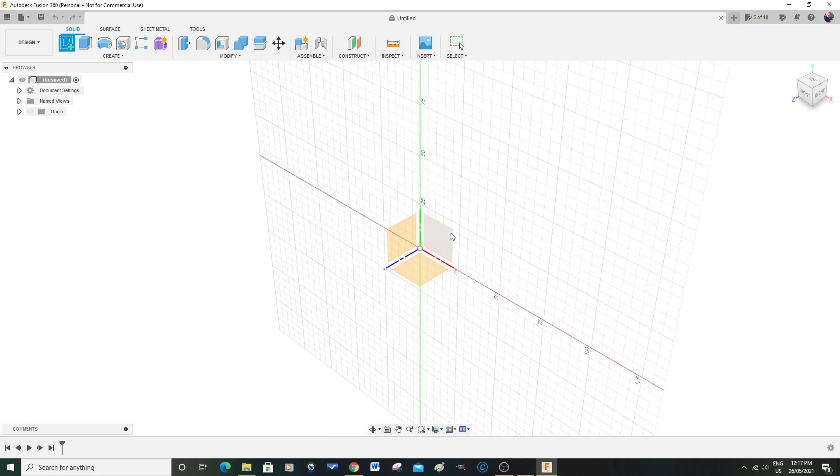To start working with Fusion 360 you need to start with a sketch, which you come up here for. After choosing create a sketch, this little icon comes up prompting you to choose a plane, a face, or a surface, and it really doesn't matter - you can choose any one you like. Later in the program, if you are doing CAM, you can alter which plane you are actually in. Just for argument's sake, we're going to choose this one.

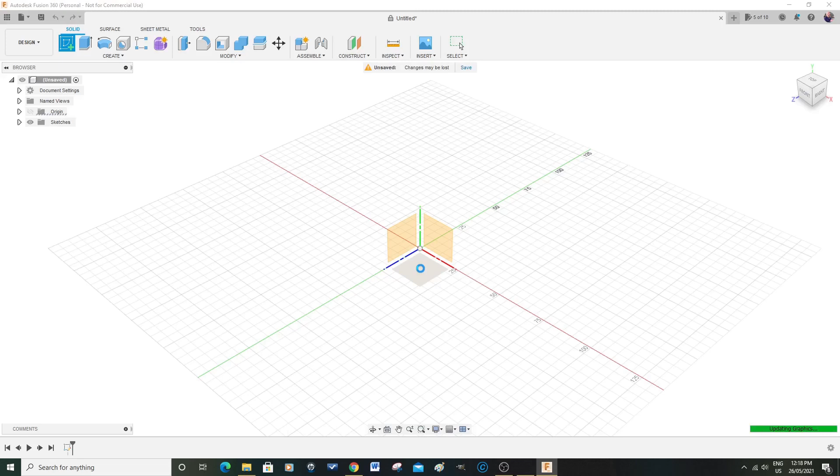If you notice in the background there, it just said updating graphics - so it just updated my graphics card, which is very nice. Now we're going to go to the view cube and just press on top, so then it squarely looks at you. If you want to move the grid around or any object on the grid, you can come down here and press on pan, then come up here, left click, and you can move it around, and zoom out and zoom in.

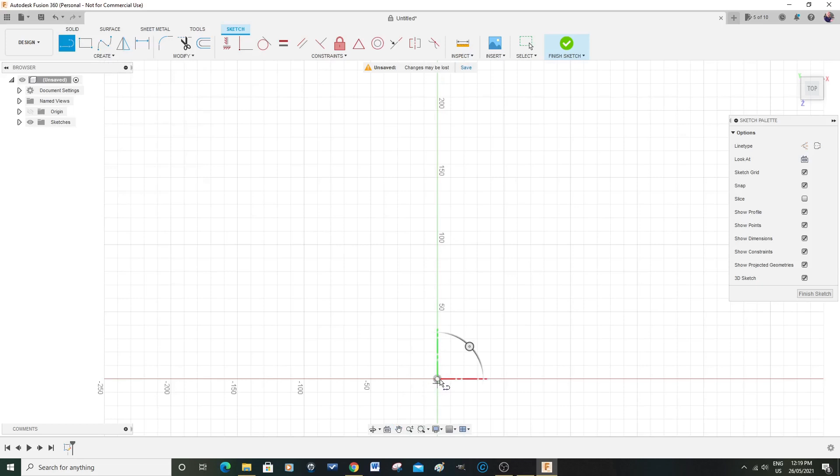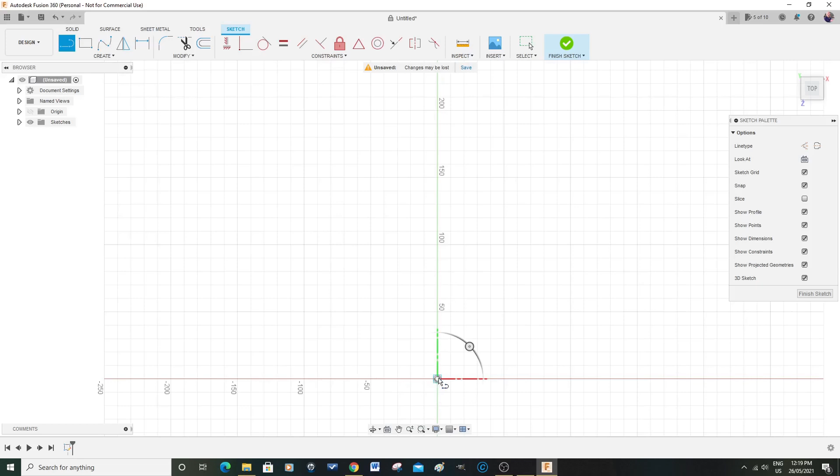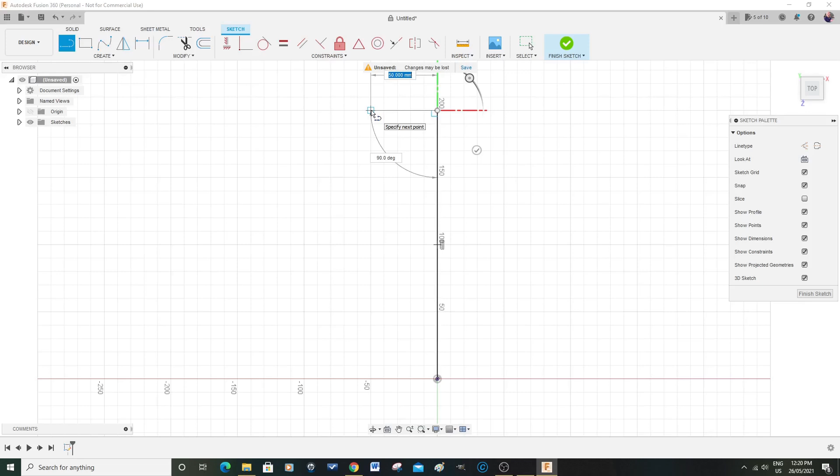So the anchor point is here - I'm going to left click, go up to 200, release, and then you notice the icon jumps from here up to here, and it follows my cursor around. I want to come out here to, let me see, 50 millimeters, and we're going to left click there again, then come down, left click, and back to the anchor point, left click.

You will notice that two of the lines are blue and two of the lines are black. That's indicating to me that these two lines in black are constrained. So what we need to do - it's not totally necessary because this is only really a framework - but I'm going to show you how to constrain it.

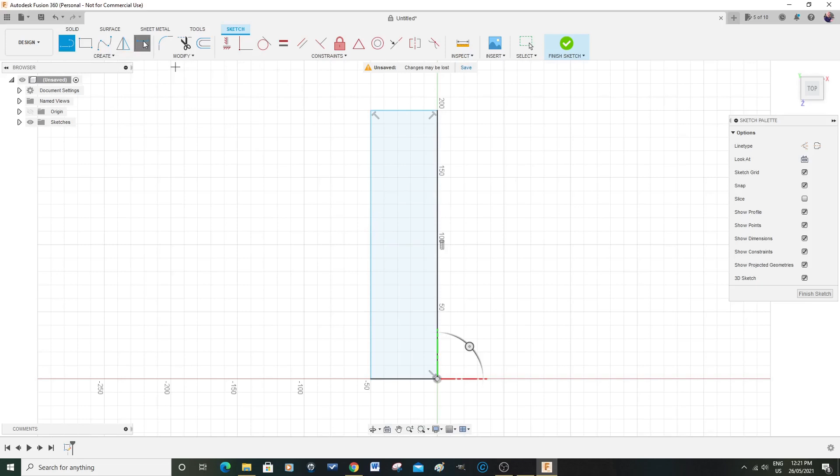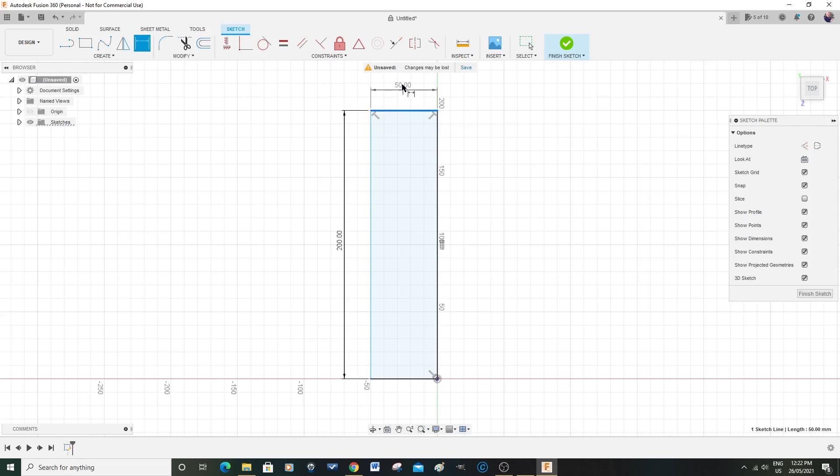I'll put a constraint on a line and make this go black. All I'm going to do is come up here, sketch dimension, choose that blue line, draw it out, and click. It's the right amount, so I'm going to press enter. And then this one, 50, enter. Now you will see all the lines have turned black. This is now what is termed as fully constrained - you can't alter this unless you purposely go in and edit it.

Now to alter the icon here that I'm moving around, you just press escape and it changes back to a normal cursor.

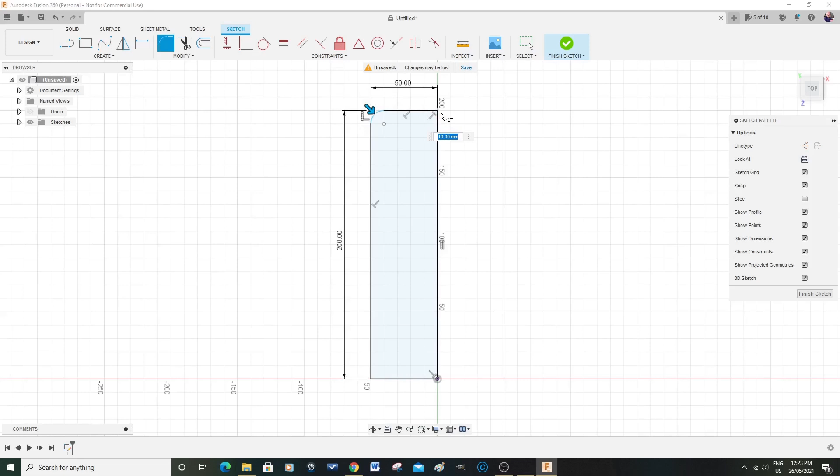So the next thing we're going to do now is put some rounded corners on here because it's RHS. We've got to modify, fillet, press that, and it is 10 millimeter - that's exactly what I want. 10 millimeter, 10 millimeter, 10 millimeter, and 10 millimeter, which is perfect. Enter. Now that's locked in.

Now the next thing we're going to do is come to modify again, and we're going to offset. So we're choosing that to offset. Now you can either catch hold of it and manually move it in, or you can give it an absolute figure, and in our case it needs to be minus 4.0 millimeters. Press OK.

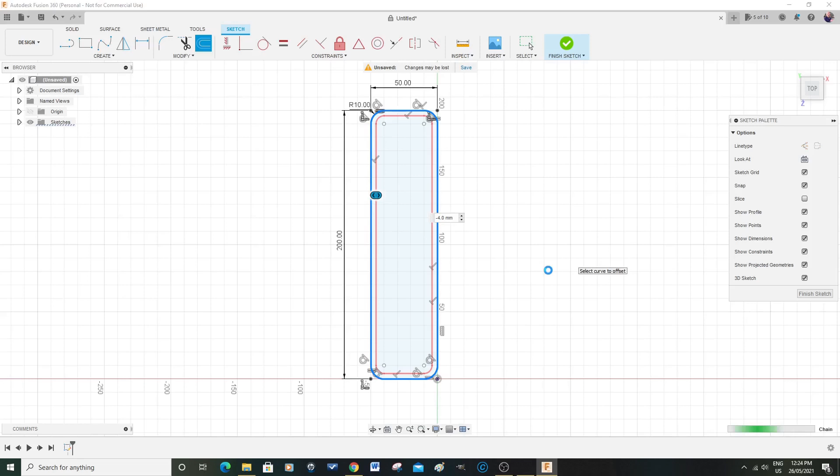And it's just started to pour with rain outside. I hope you can hear me okay above that.

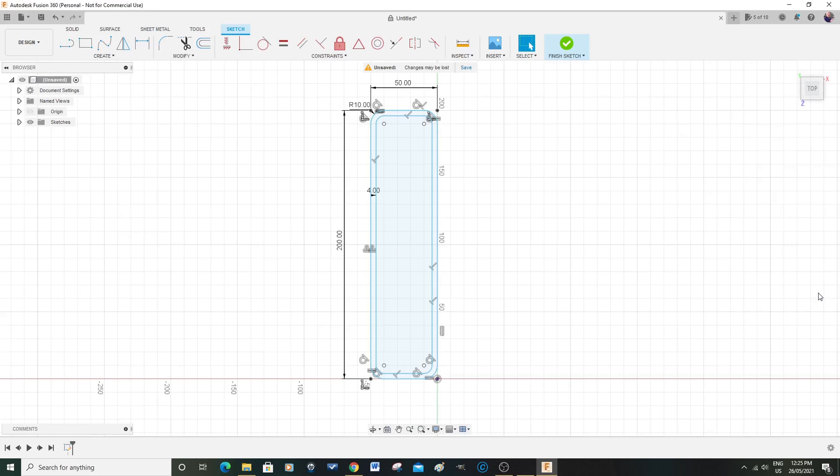So the next thing we're going to do now is extrude this, and that is a very simple process. We've finished this part of the sketch now, which takes us into the mode of extrusion, and we want to extrude that part.

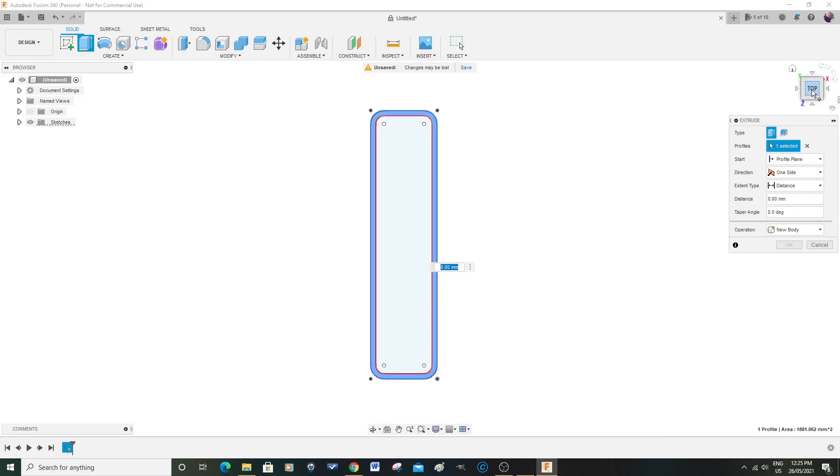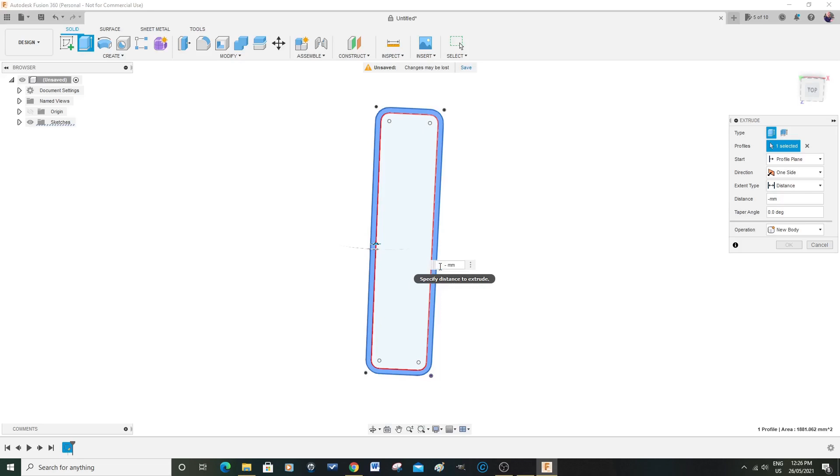So it's highlighted. Now I'm just going to move the view cube, rotate round, and I want to go, I should put an absolute figure here, so I want to extrude it back away from me, so that will be a minus, we're going to go 2 meters, so that's 2,000 millimeters. Enter.

And it's as easy as that. That's one RHS made. And RHS means rectangular hollow section.

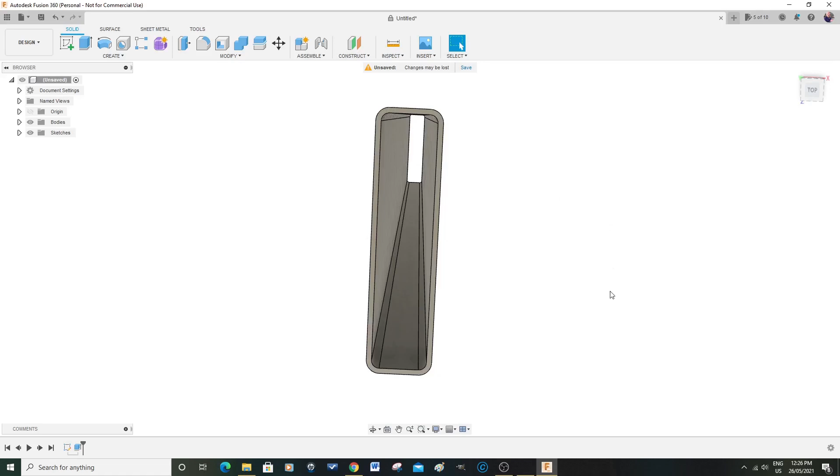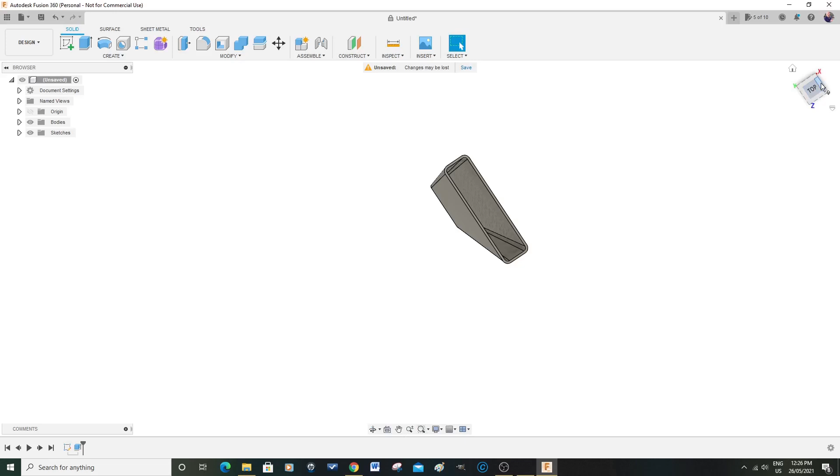Okay, so let's zoom out a little bit, and now we can go to the orbit and move this around in free space. So indeed you can see... escape. So what I'm showing you is different ways of actually moving around in space, like this.

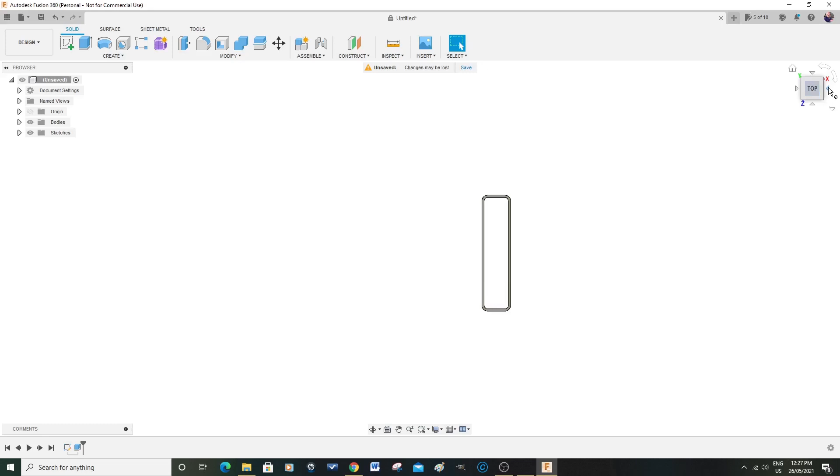So if you put top, you just hit top, it'll go sideways. So you can see that it is a piece of RHS. Pan. Let's pull it in. And actually this is where we actually need it right now.

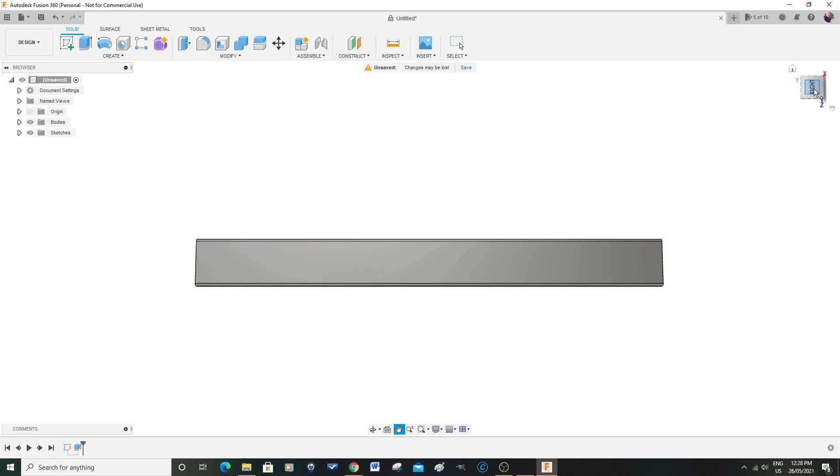Okay, so now I'm going to do the cross sections. If you remember at the beginning of the video, I showed you that we were going to model up in 3D the CNC router that I'm actually in the middle of building at the moment. So we have one section here, which is one of the main, this is the Y axis.

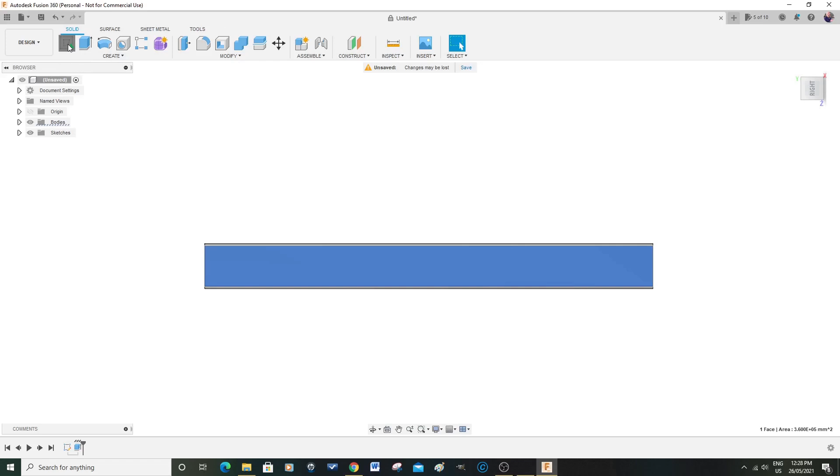So now we want to make the cross sections. So what we'll do is, and this is actually upside down at the moment, so this is going to be the bottom, this is going to be the top. So I'm going to choose this face to work off, sketch this face, and I'm going to zoom into this area here.

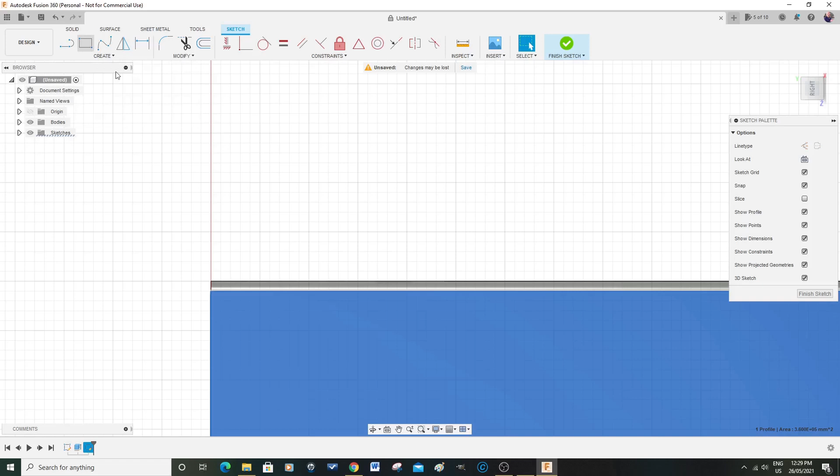So the cross-section RHS is 50 by 50. So I'm going to choose a rectangle. I'm going to come here. You can see it's locked there. You see how the cursor changes. I'm going to draw it up. Oh, it's 100. 50 by 50. Enter.

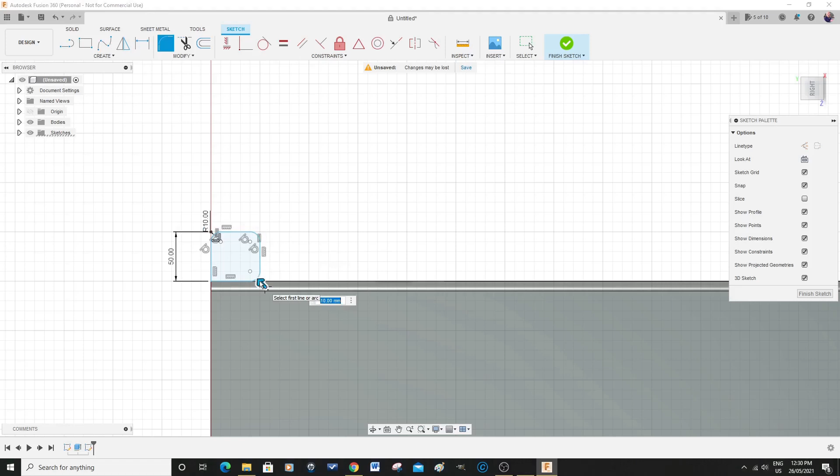And then I'm going to come here again, choose the fillet, and again it's 10mm, which is exactly what I need. 10mm, 10mm, 10mm, and again 10mm. Press enter. So that's locked in.

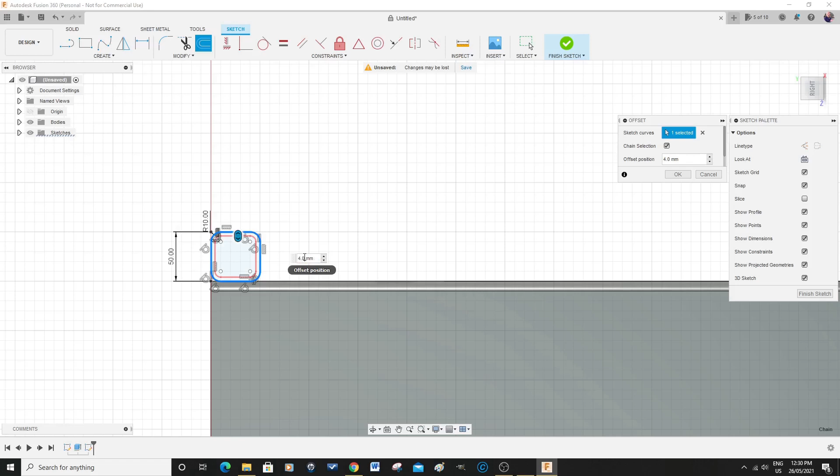Now what we need to do is choose the offset, choose what we just drew, and bring this in 4mm, because it's a 4mm wall. 0, press enter. Now that's locked in.

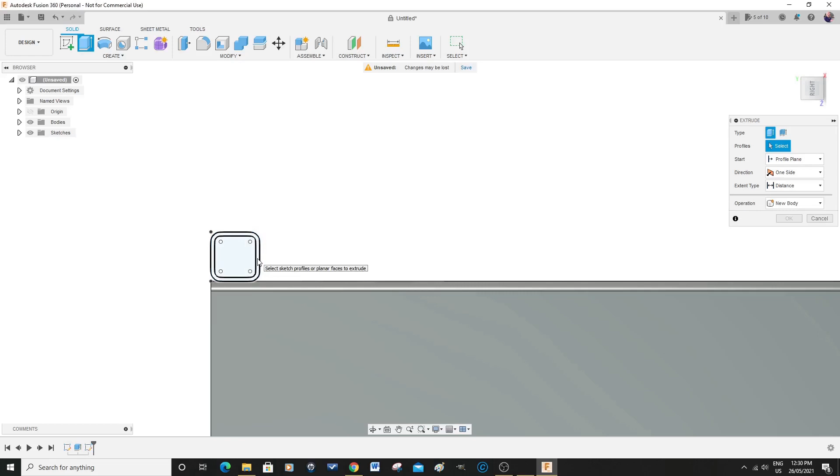Now we've finished our sketch, and we choose what we want to, better press the extrude, press that. Why is that red? There we go. I don't think that really matters.

So we want to go minus 1500. Minus, oh, that's 15,000. A little bit too much. Minus 1500, and we'll go enter.

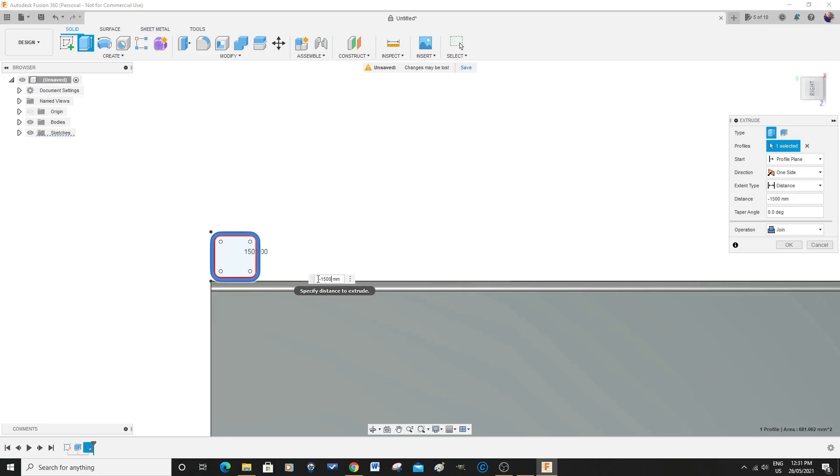And we're going to zoom out. Have a very quick look. And there it is, connected right where we want it.

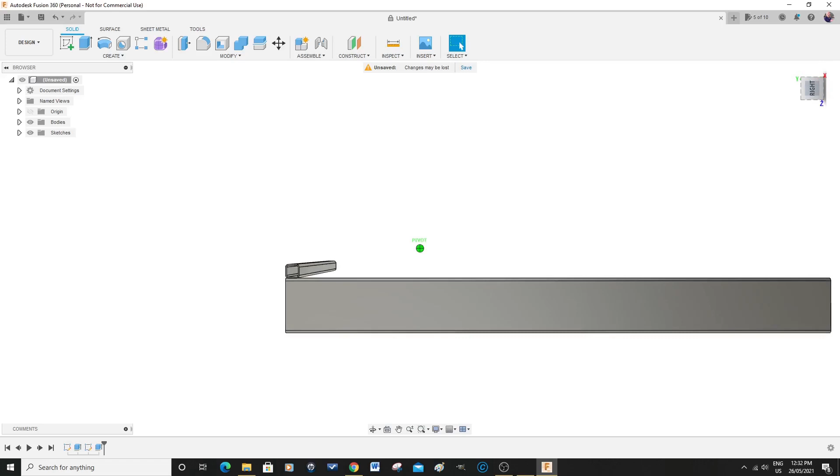Now then, we come to a very neat little trick to be able to avoid going through the process of making these individually, drawing these all the way down here.

So what we're going to do is duplicate this whole piece and place it in strategic areas further down the beam here. And the way we do that...

is you can either go up here to bodies and sketches, and choose which one it is, but I find it much easier to come here and choose the body. It highlights it, then come up to the create bar and come down until you come to pattern.

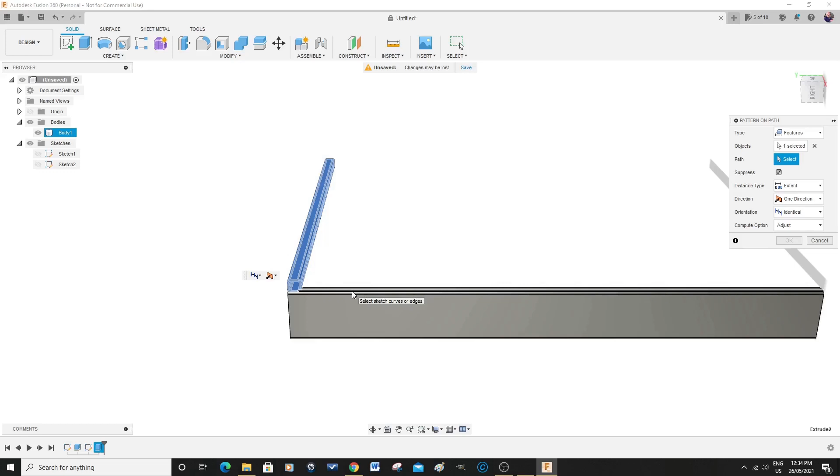When you come down to pattern, you come here to pattern on a path. So better select that again. So then this little dialog comes up. We've selected our part that we want to duplicate, so now we want to select the path, which is here. Just select the line where I'm on there, select that.

So yes, it's in that direction we want to go, and let me see, this is 2 meters, that's 50, so this wants to go 1.90 meters. Might be 1.95 meters. We'll just check. 1 meter.

Keyboard's playing up a little bit.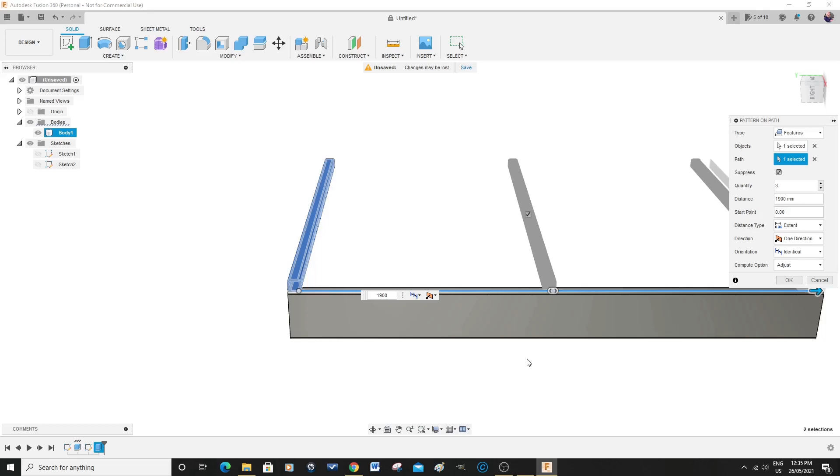1900. Okay, I think that's right. Yep, that's going to take me right to the end. Well, it's actually saying I want 3, now I want 2. So we alter that to 2, and it's going to place one right there. I think that's going to be in the right place. Let's OK that.

No, it's not in the right place. It should have been 95. So if you make a mistake, you can come up here and just delete it straight away. So you just go back.

I don't think it's necessary to even highlight it first. Pattern on a path, select path, that way there. So now we'll put the right figure in.

So Fusion 360 is very, very forgiving.

1950. I don't know what's the matter with my keyboard. It might be because it's winter time here, and this is out in my workshop, and I think the keyboard is playing up. I'm going to have to change it.

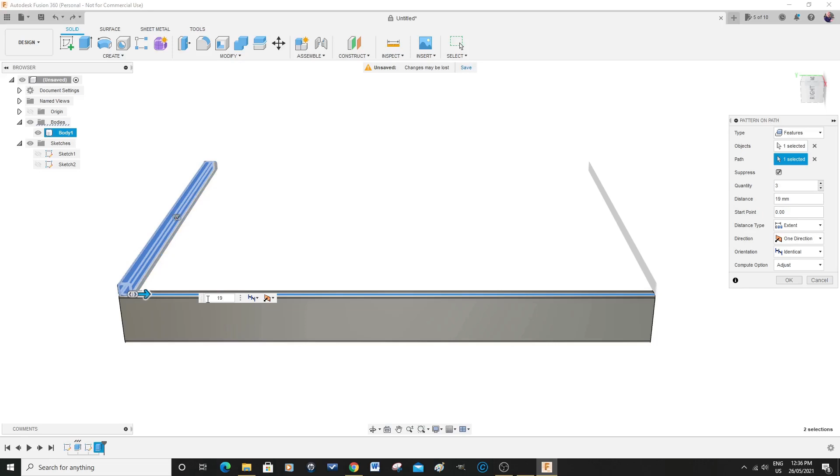50. There we go, and we only want 2, and we're going to OK that. There you go, put it in the right place.

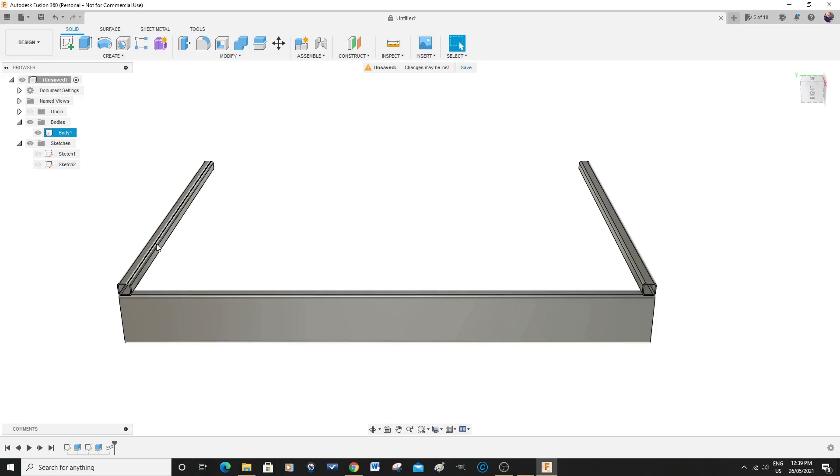So another method of doing this is actually placing, I want another 1, 2, I want another 3 here. We can do it in one shot. In fact, we could have done them all in one shot after making this one. So I'm going to show you that way of placing objects.

So choose the extrusion, create pattern, path, select path. There's the selected path, and what I'm going to do is give it the measurement of this one all the way out here.

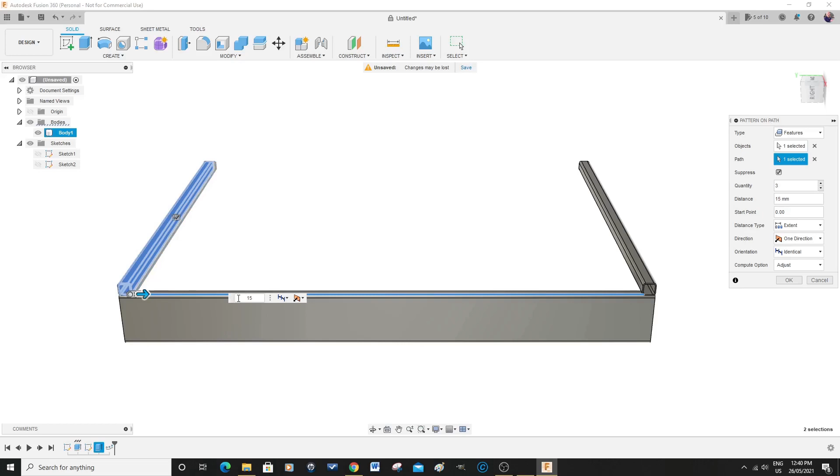So that will be 1 meter and 55... 5. So it'll be 1 meter, 5, done it to me again, 1, 5, 50. That actually looks a little bit too far.

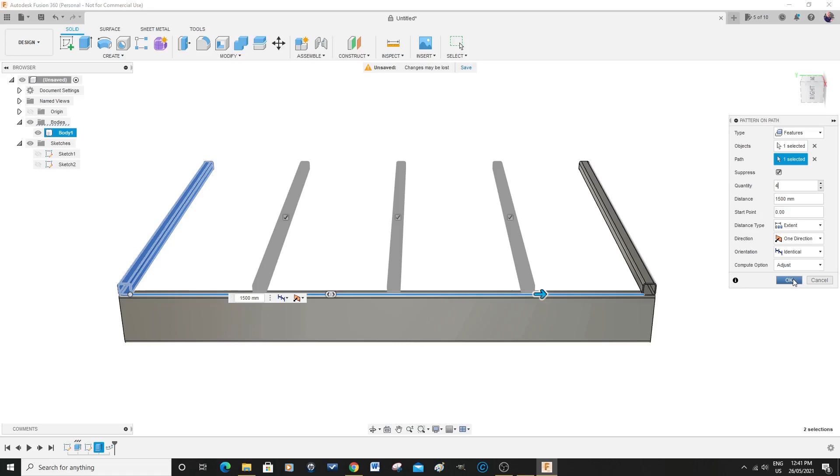Let's try taking that 50 away. That looks better. I'm going to say I want 4, and it's equally spaced. It just takes out a lot of work for you, and we're going to press OK. And there they are, already correctly placed.

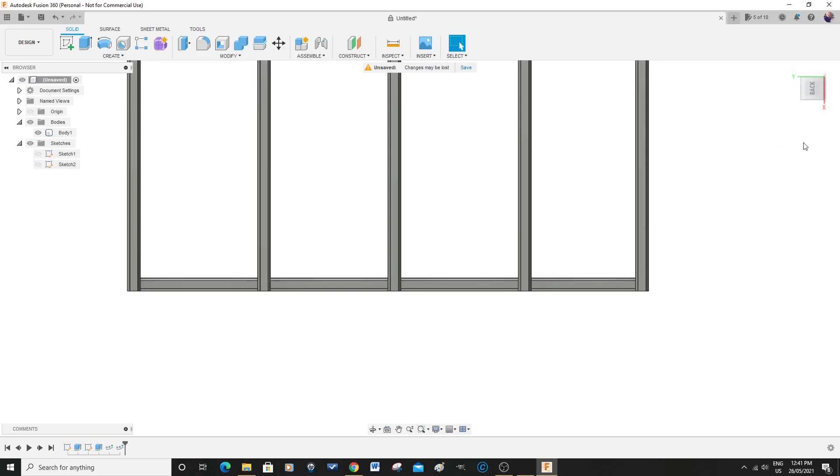So now what we need to do is turn this upside down. First of all, we're going to go there and have a look, so make sure we're happy with it. Yep, I'm sure about that. And there's an end-on view. That looks very good.

Let's just rotate that round a bit. That's looking very good. I quite like that.

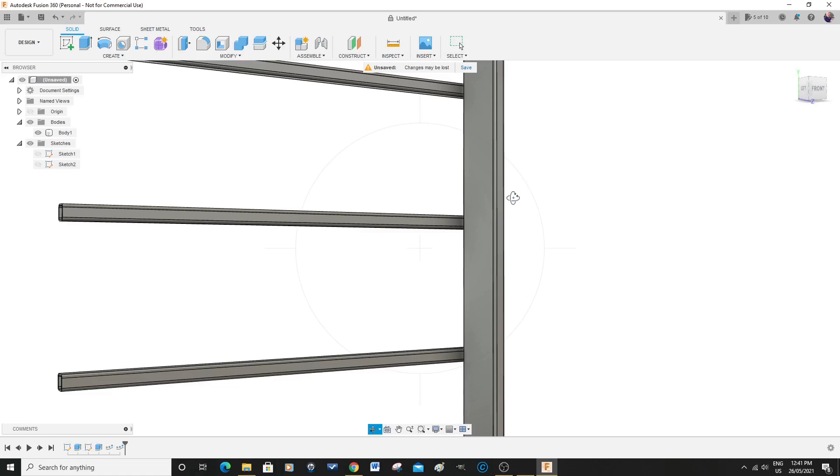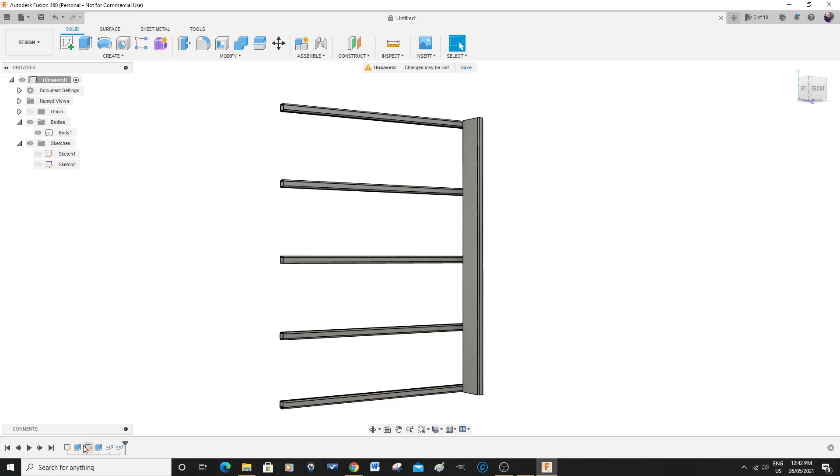So now what we're going to do is choose this y-axis one, and we're going to place one over here. So we press escape to get out of the panning around tool, and we're going to go back into here, which was the first extrusion. Click that one.

And then we're going to go to the create, and we're going to come down here to path, and we want to come up this way. So we're going to choose this center one. So if we go select, choose this center one.

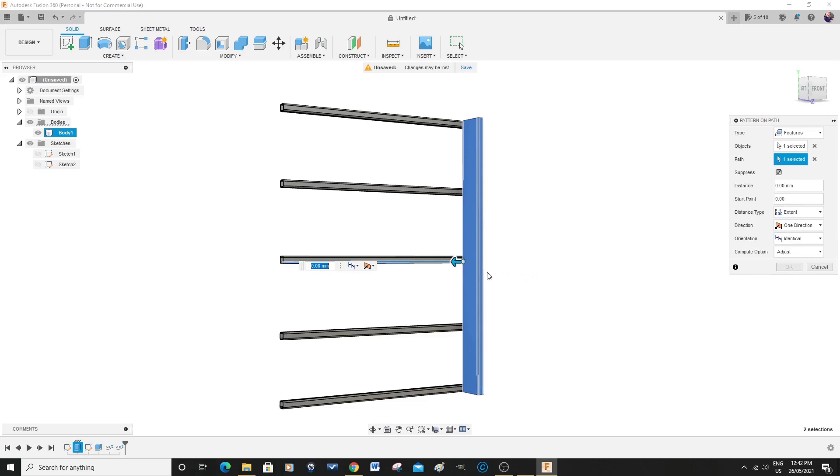And now this is another method of doing this. You can actually catch hold of it and manually pull it out until it becomes right, or what you perceive to be right. That's actually what needs to be 1450.

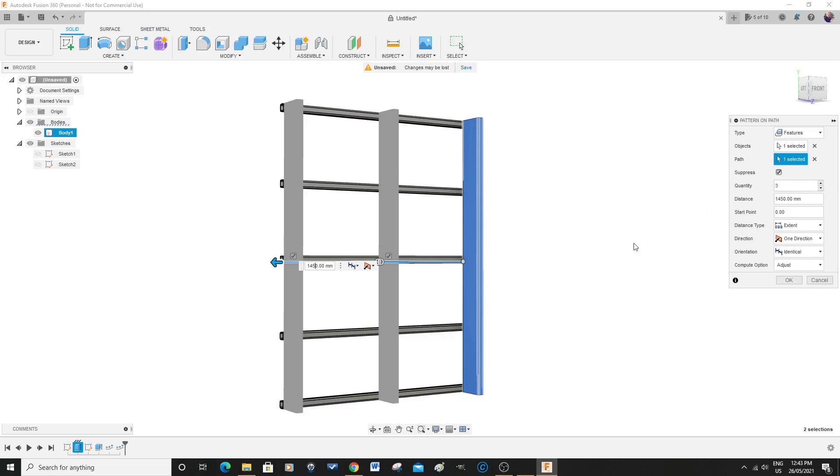It's actually snapping to the end because it's a rounded area on the bottom side. It's trying to connect the flat to the very end, but we're going to say no, that needs to be 1450 because there's a 10mm radius there. Rather than go here and alter the amount or quantity, you can go here and untick that one and it disappears.

Okay, and then press OK, and there it is. So I'm showing you as many different ways of doing the same job, as it were.

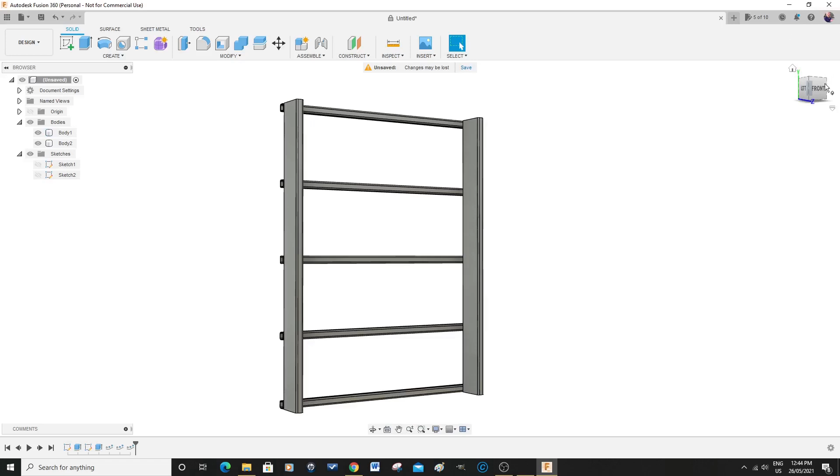Let's move this around a little bit more. Coming onto the view cube, it's looking quite nice now. So you can see that it is pretty easy to make up.

In this case it's a CNC router bed. This is a very simple bed, and it's a bed that I've designed to be simple and easy to make. So what I'm going to do now is show you how to extend a part in a different direction and a different part.

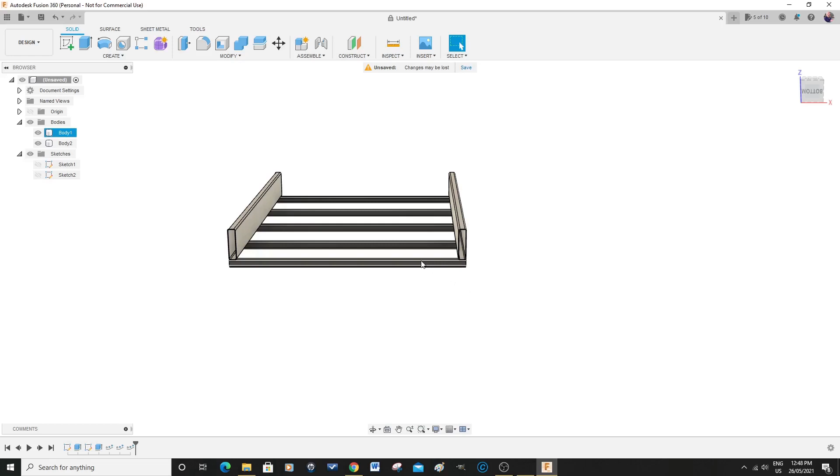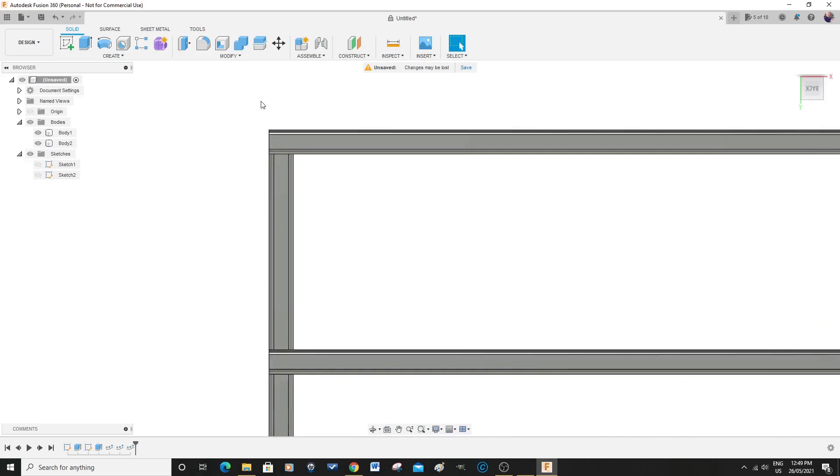So what I'm going to do is flip this over now. You catch on the view cube and just partially move it over, then just press on an area that you want. So we're going to be working in one corner, so we'll zoom into that.

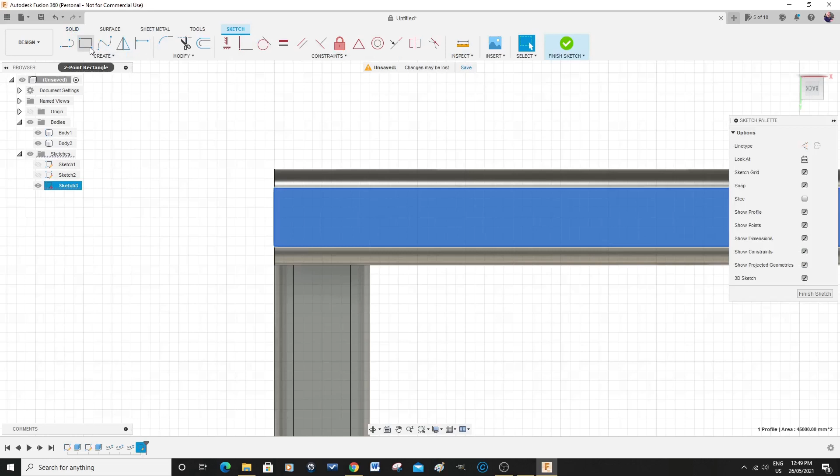Okay, so now we're going to go back to sketch, and you want to sketch on that face, and we want again a rectangle. So we're going to come here, and you can see the cursor actually snap into the grid there, which is a very, very big help.

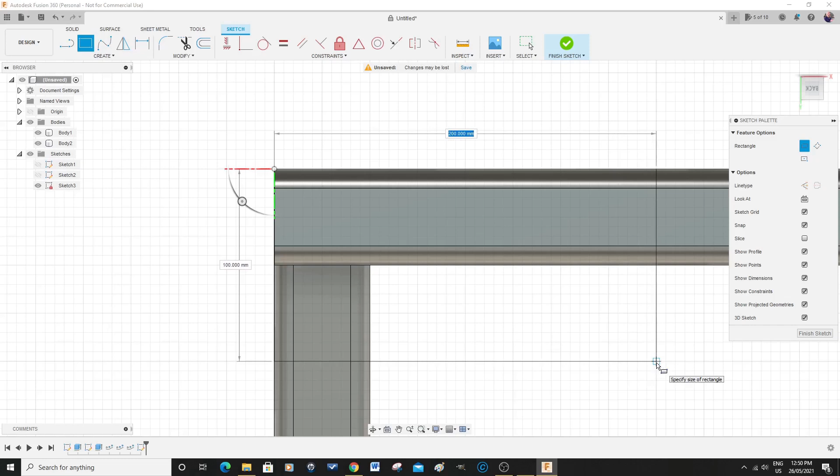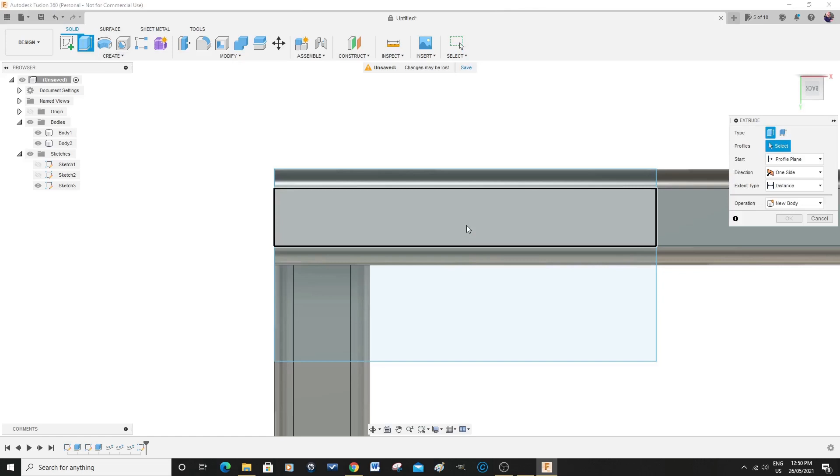Perfect, left click. So that's there now, and we've finished with that. Now we want to go straight to extrude. Sometimes this will happen - you may have to choose three different areas. So you choose one area, then press shift, choose the next area and the next, so you're sure of getting the whole piece you just made.

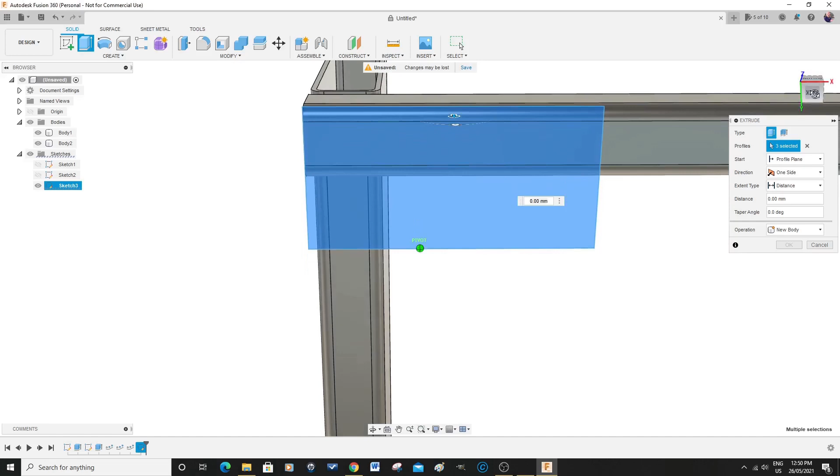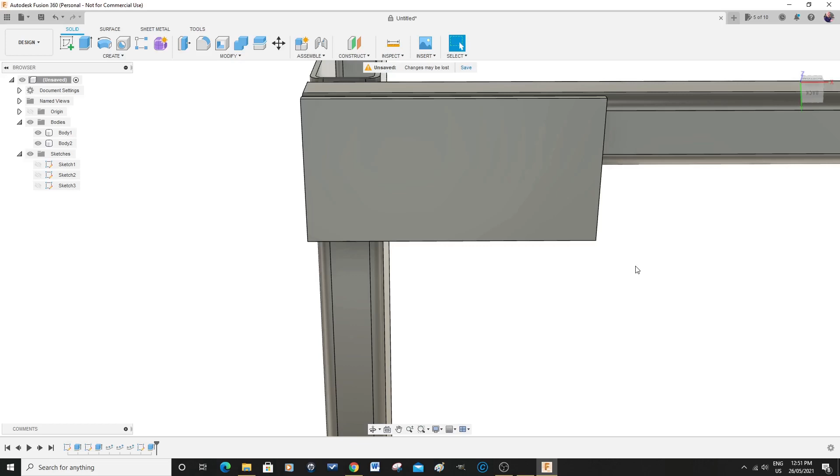Now I'm going to rotate this over a bit so I can see that I'm coming in the right direction. And that needs to be 6 millimeters - I was using 6mm plate. Okay, and there it is, a mounting plate.

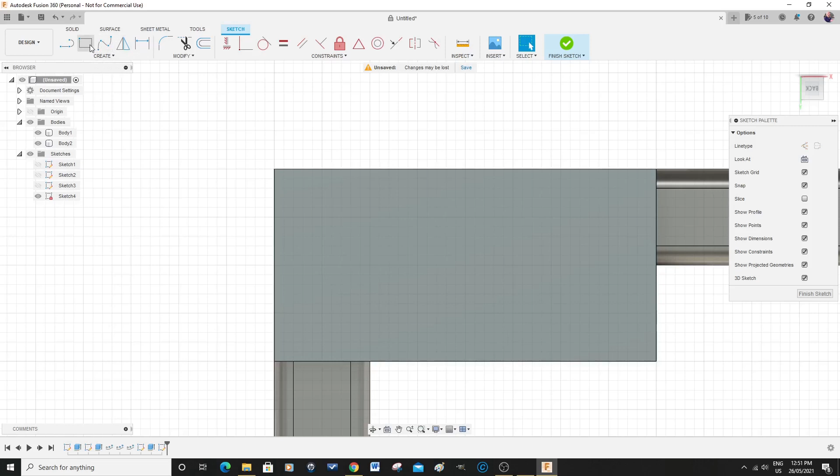The next thing we want to do is look at it square on again, and now we're going to draw a leg. So create a sketch of that plane, come here, 100 by 100, click. It's very simple to use, actually. We haven't finished the sketch yet, but we're going to press enter because we want to keep that.

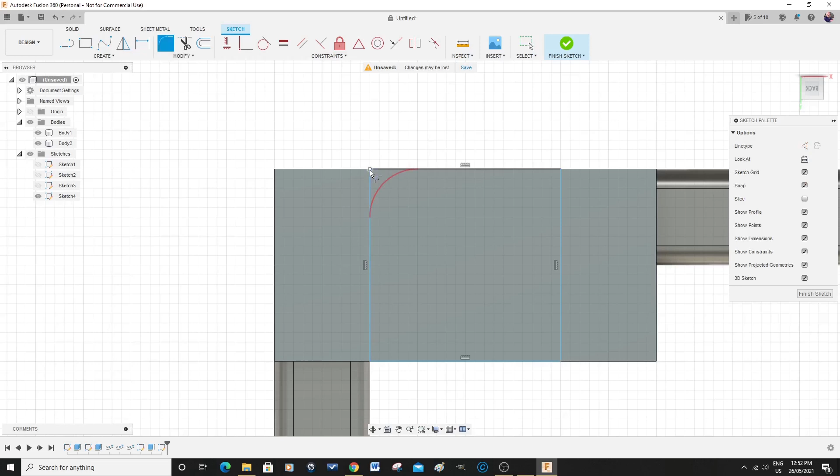Again, fillet this corner. Oh, 25, it's not - it's 10. Better. 10, 10, 10, and press enter.

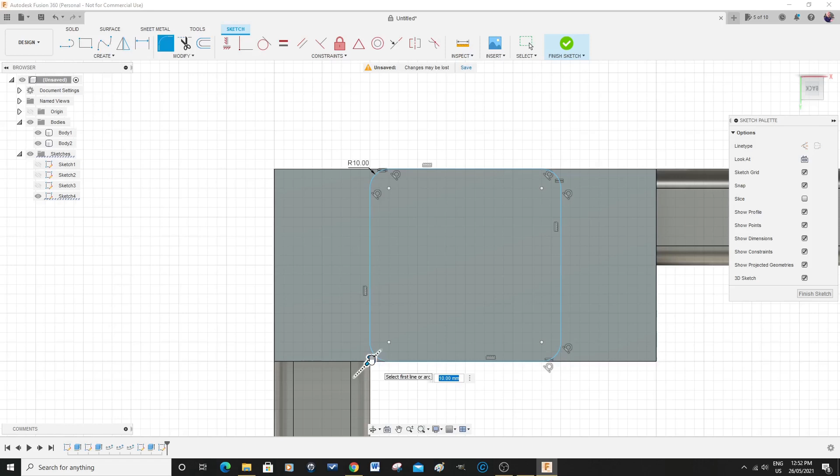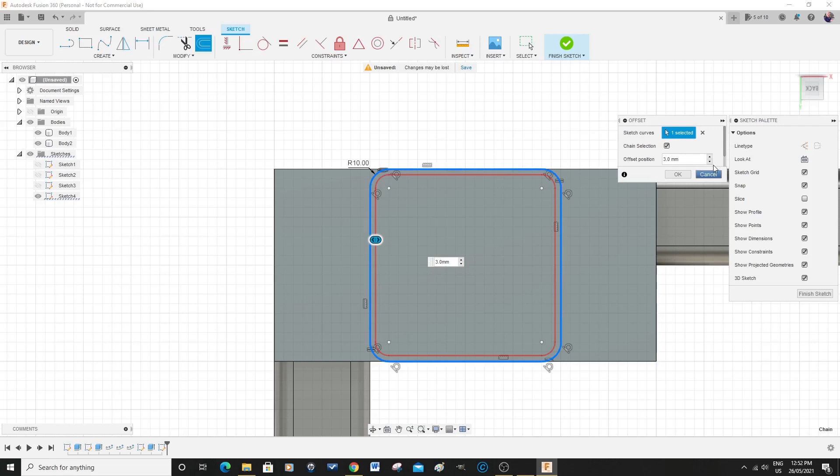So it's the same trick again. What we're going to do is go to the offset tool, choose this, offset it by 3 millimeters - 3mm wall thickness on this 100 by 100, or 4 inch by 4 inch, which is roughly 1/8 of an inch, and we're going to OK that.

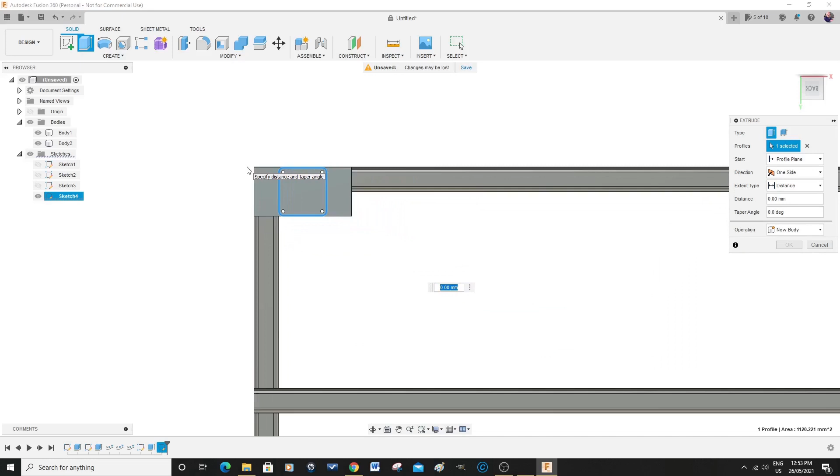And then we're going to say that we've finished doing the sketch, and we want to extrude that. Choose that piece, and again I like to come out and make sure that I'm extruding in the right direction. Just tip it over, and you can pull it out if you want to.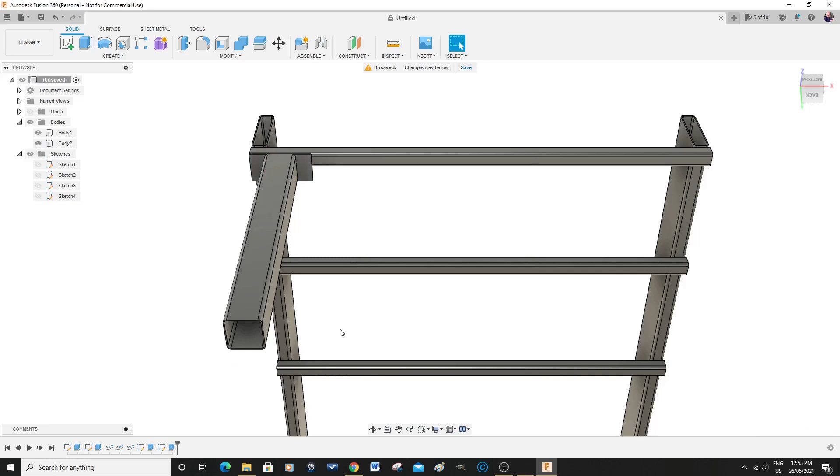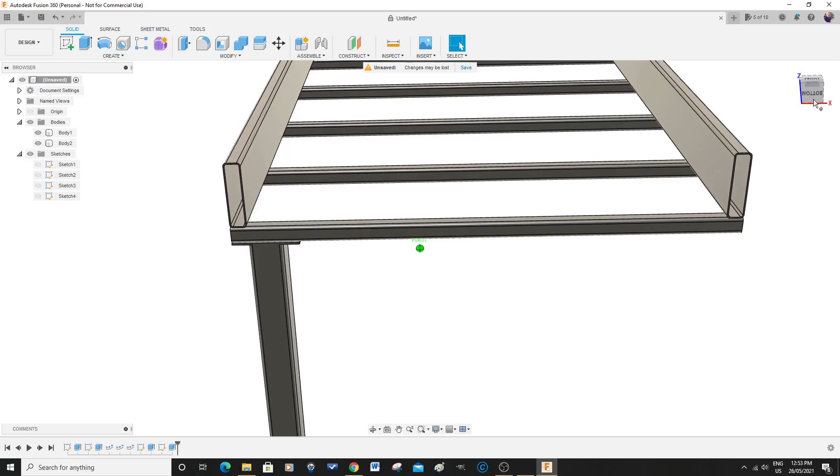800, which is absolutely fine, and press enter. So, and there's one leg. And it's that easy, you know - there's really nothing at all complex in this, and you can build up. This really is a very simple frame, but it's put together very accurately, shall we say, in Fusion 360.

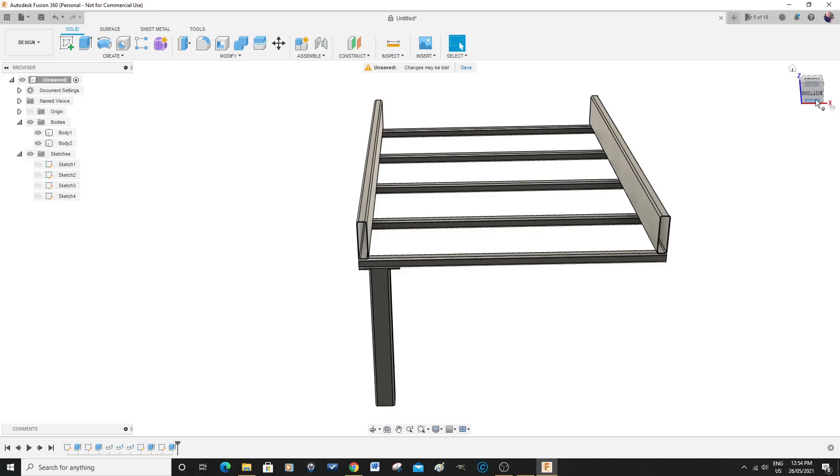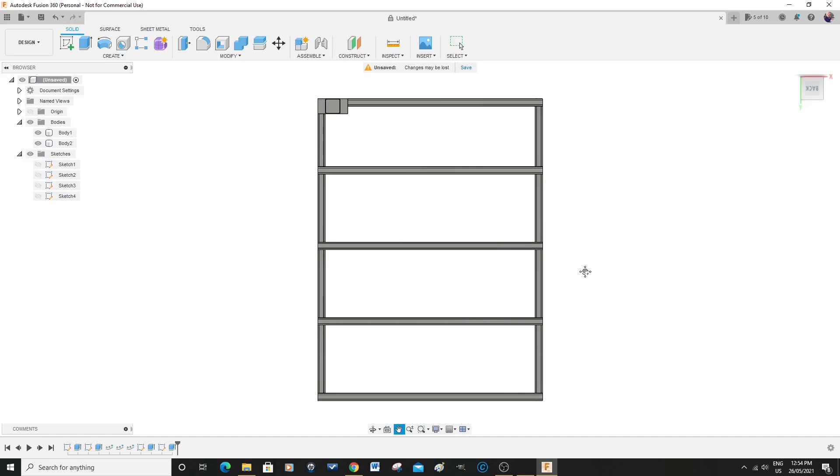So now we're going to duplicate these legs around, one in each corner. What I'm going to do is come here, press back, zoom out, let's pan it a bit so it's in the middle. And it's just the simple process again of copying, you know. Let's press - you notice that the pan cursor is still active, so to get out of that you just press escape.

So what we're going to do is choose that extrusion and that extrusion - what I've done, I just press shift. In other words we're going to duplicate multiple extrusions this time.

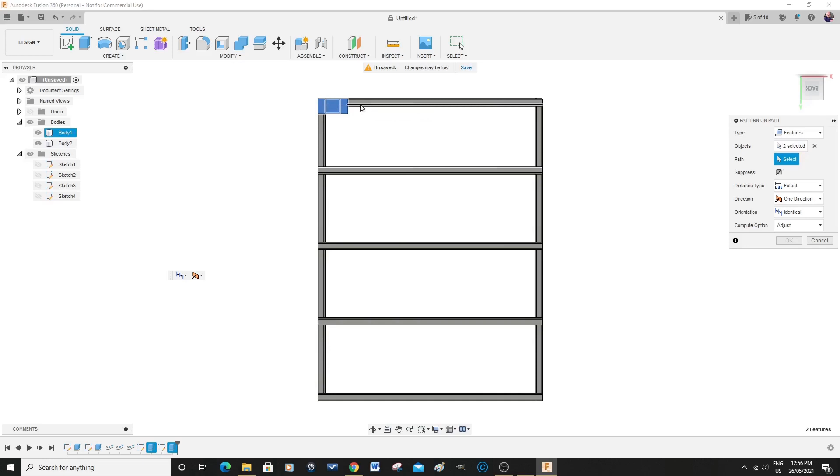So again we come into the create, we're going to continue with the same mode of practice then, and select that one there. So we only want 2. That's good. Enter.

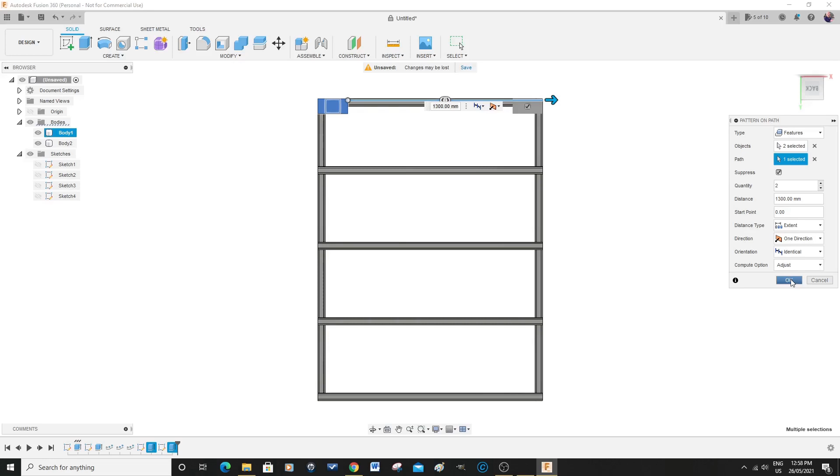We do the same trick. Instead of choosing the extrusion, I'm going to choose the last action that we did, which is the same thing. So I'm coming down here to pattern along a path, select a path - which doesn't really matter, I'm going to say this one here.

Okay, so rather than try and drag it, I've put a measurement in there that I know is correct, and we only want 2, so we can get rid of that one in the middle and press OK.

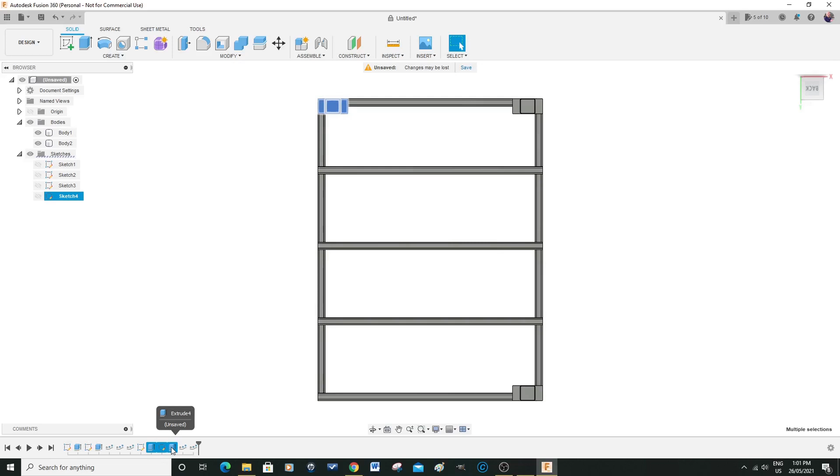And we're going to do this - we're going to go back to, not that one, we're going to go to this one again, choose the 2, and it's a bit repetitive, but you can see now how it's built up. Using the tools, it's actually a very good type of design practice, and you know, you get used to using the tools.

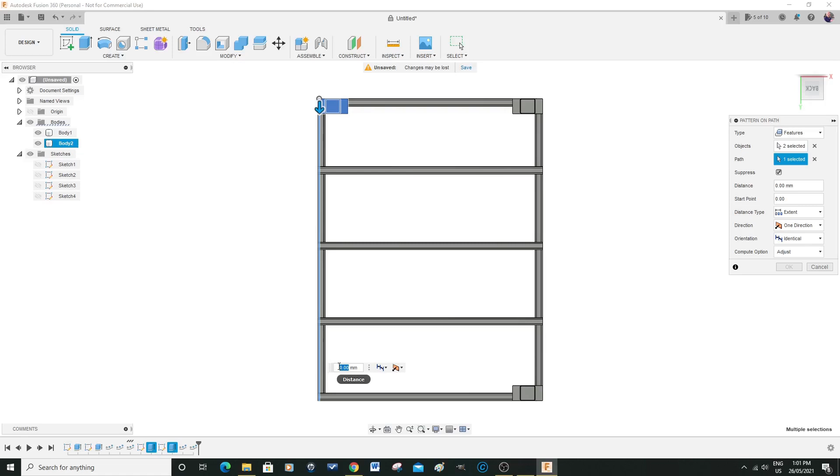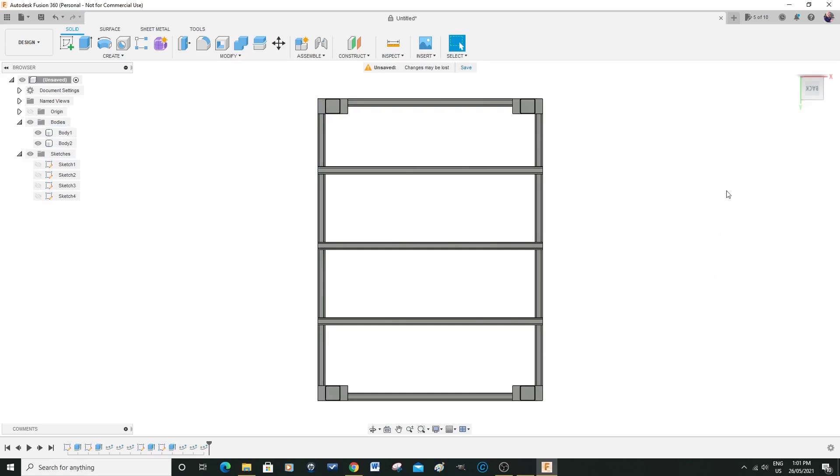900, and we only want 2, and okay, so our design is actually done. Let's have a look. There it is.

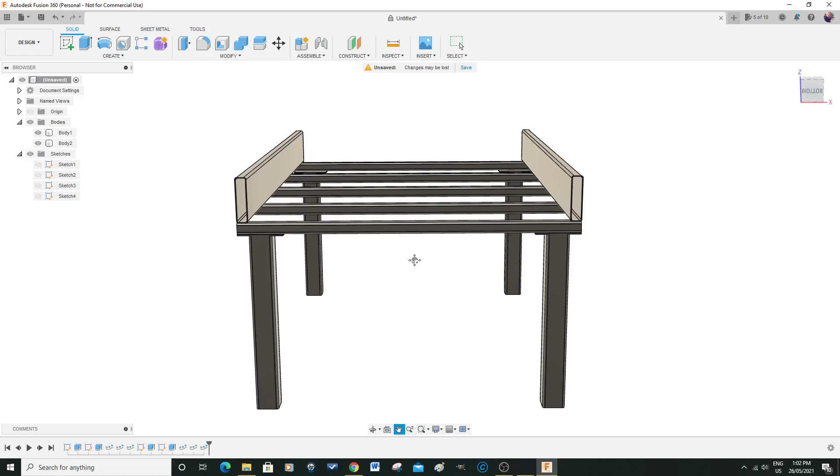Pan it up there a bit. Doesn't that look quite impressive?